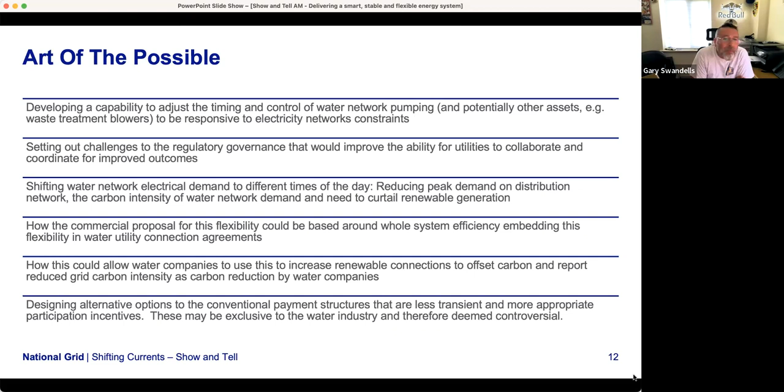So we've already developed quite a number of use cases, 16 in total, which capture the flexibility that's on offer within the different industrial processes they have, as well as the potential future consumption profiles from electric vehicles, etc.

So in the process, we looked at taking the outputs that we already had with the use cases and establishing, first of all, whether those were localized to South West Water only, or whether those can be achieved right across the water networks. Probably some of the key factors are whether the industrial processes are different, driven by the topography. South West Water is clearly very different from some other areas. If we look, for example, over to Anglian Water in the east of the country, the land is far flatter, so the processes of treatment and pumping, etc., do have significant differences.

But going through the process within Discovery, we took these use cases and captured data from quite a number of the sites across all of the partners we're looking at, and carried out a similar technical assessment in order to establish whether the art of the possible, what we were hoping to identify within the NIA trials, actually transpires through to a wider geography and a wider area of the market.

So coupled with that, identifying that indeed we've not seen anything conflicting with the assumptions that were made from the previous project Flowers, it's worth noting that the closed-down reports are all published from Flowers. So if you're interested in finding out more about the detail of the industrial processes that we're looking at and the latency that has been identified, those can be read in the Flowers outputs.

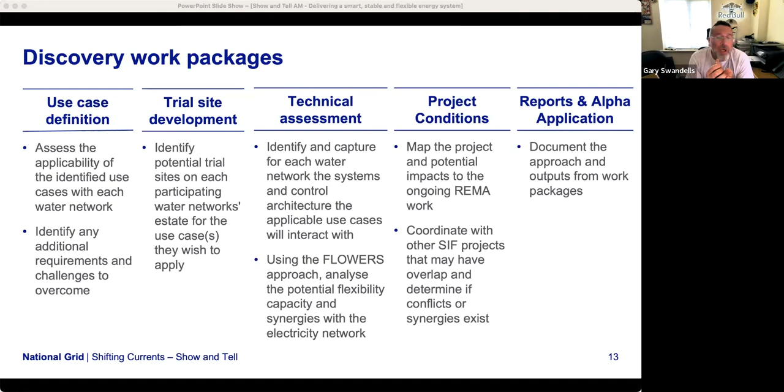But rather than pushing that into a system where it can be relatively transient, and the opportunities to generate income are sometimes not long-term enough for the way that the water industry itself does its budgeting, we're looking at alternative mechanisms that would, first of all, help them in acquiring more renewable generation, which in turn would help with their net zero targets. Can we move on to the next slide, please? And I'll just touch on project conditions.

Oh, so I'm sorry, I've already talked through that process. If we could go to the, yes, so from the Flowers project, there is quite significant value that we identified. We've tried to extrapolate that out as to the potential that may exist across the country as a whole. Within Flowers, we identified anywhere between 18 to 34 megawatts.

The variation is due to seasonality and also some level of investment that would be required in order to release that capacity. But based on them only having 2 million customers and 18 to 34 megawatts of capacity, if that's then extrapolated out to the UK population—and I appreciate for the discovery phase this is a very rough method of extrapolating out the benefits—what we could be looking at is anything from half a gigawatt to a gigawatt of flexibility on offer from the water industry as a whole.

Using the figures that NGED themselves have for procuring electricity, that could be as much as a £5 million benefit to the electricity distribution as a whole per annum. If we could skip to the next slide, please.

So in terms of moving forward from discovery to alpha, realistically what we're looking to do is—within discovery we've confirmed that the practical approach is the same, but as yet we've only really done this at a desktop level. So moving into the alpha phase, we're looking to identify the best sites across the partners we're working with, and carry out full operational trials on each of the different site types, be it wastewater or drinking water, and establish whether the desktop analysis and assumptions made therein can actually be achieved in proper operational outputs.

That would also include looking at the methods by which communications would take place between the control centres, engaging with regulators to discuss different mechanisms and alternatives for incentivizing that take them outside of the current developing markets. And then, if we're looking to encourage behavioural change at a local level, we also need to understand how carbon is calculated—moving away from using average carbon from total electricity consumption, and instead identifying the actual localized carbon impact of shifting load profiles in order to achieve better efficiencies within the networks.

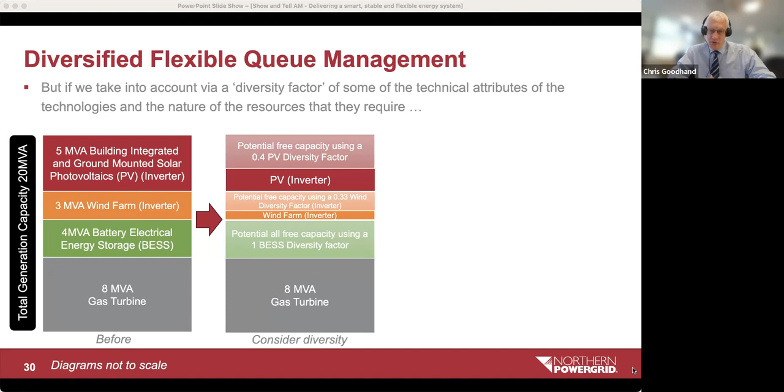So if we consider all this diversity and say, well, okay, how is the real world behavior of the generation likely to be, we start to look at that, we expect that there might be some available capacity that we can use to connect additional generation while we get on with building more network to support the longer term view. This project is all about exploring how we might do that, what issues we have, how we can dynamically manage the connection queue at any particular point, how we can regard the generation that's there and its inherent characteristics, in order to exploit that diversity and see if we have more available capacity. So that's the problem.

Mazher and Laura have been working very hard to actually answer some of those questions, so I will pass it over to them to tell you how they've got on with that. Thanks very much, Chris. If we can go to the next slide, please.

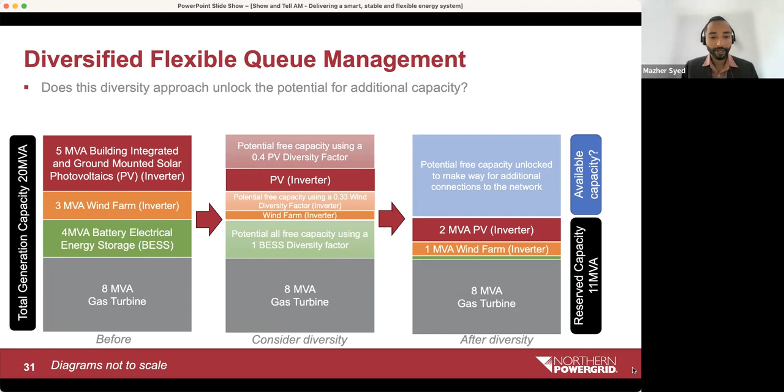Another one. So just a brief introduction. I'm Mazher Syed, an associate power systems consultant at WSP, and I was leading work package 1 of this particular project. The objectives of this project were delivered through 3 work packages.

The first work package looked at defining the problem and quantifying the problem at hand. The second work package looked at the regulatory barriers and any opportunities that we might have. The outcomes of each of these work packages, 1 and 2, directly fit into development of use cases and high-level benefit analysis in work package 3. If we can go to the next slide, please.

As part of work package 1, we developed and verified 2 hypotheses. The first was that the actual available capacity at a GSP is much higher than what we currently consider as available, by means of considering dynamic headroom that is available at the GSP. The second was that this dynamic headroom, this actual available capacity at the GSP, can be effectively utilized if we consider the diversity of the generation mix. So if you have a suitable composition of generation mix, then this dynamic headroom can be effectively utilized.

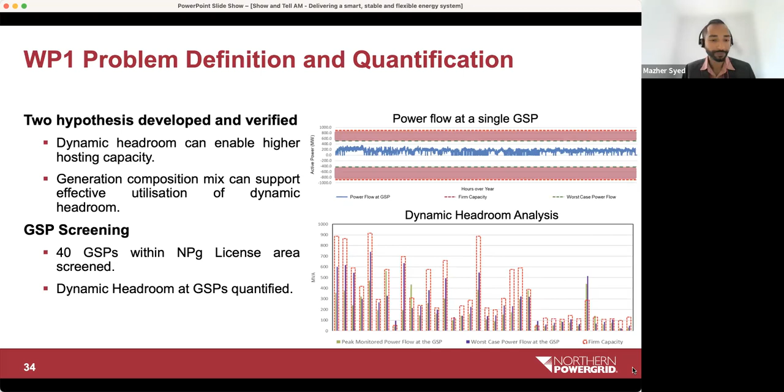In order to do this, we screened 40 GSPs within the NPG license area, and we quantified the dynamic headroom at each of these GSPs. We relied upon publicly available data to undertake our analysis from 2019 and 2022. Just a snapshot of this analysis is presented in the right-hand bottom corner graph. If you can go to the next slide, please.

At the same time, it was very important for us to engage with stakeholders to understand their point of view on the current existing connections queue management, and what their thoughts would be if we bring in this diversified flexible queue management. So we set out to identify a few stakeholders and assess their inputs based on likely interest and influence over the outcomes of this work.

We developed a questionnaire which was passed on to our stakeholders, and we also arranged 30-minute interviews with each of them to gather their feedback. We've had good sessions over the past couple of weeks, which is now directly feeding into our work in Work Package 3.

The outcomes of Work Package 1 and Work Package 2 have now allowed us to prioritize 8 GSPs for further evaluation. Now we are working towards developing use cases and demonstrating the high-level benefits that can be acquired when we incorporate the diversified flexible queue management.

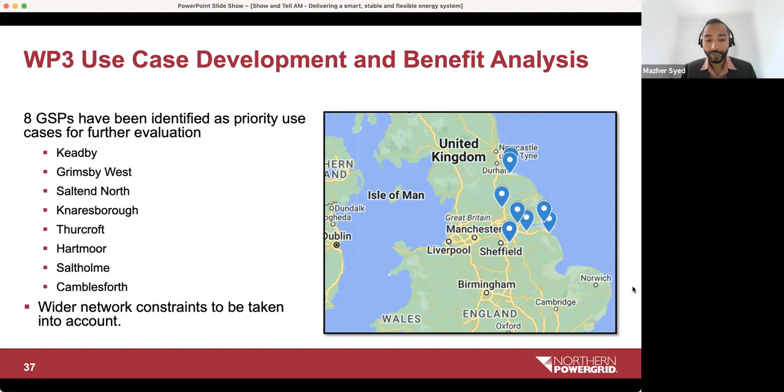Right at the beginning of the project, we had set forth some hypotheses. We had a feeling that by utilizing the diversity of generation and load within the network, we could enhance the hosting capacity. Through the work we've done so far, we've been able to verify this hypothesis, and now are optimistic and excited to proceed to the next stage, the alpha stage, to develop the proof of concept. Now we are working towards refining our objectives and work plan for the alpha phase.

That'll be the end of my section, and I'll now hand over to Laura.

Good morning, my name is Laura Brown and I'm the Commercial Manager for Flexibility Services in Northern Powergrid's System Flexibility team. Thank you for your interest in this project, and I'd like to briefly summarise our further discovery phase dissemination plans.

We have 3 routes in addition to the show and tell today. We're going to deliver a more comprehensive show and tell session and make that available online. There'll be outcomes posted through our media channels, and we'll be preparing a paper for the IET Future Power Systems Conference later in the year.

I'll quickly go through the conclusions to leave some time for questions. What we've found in this study is just what we thought: the discovery phase has shown some really promising connection timescale benefits from taking diversification into consideration for both generation and demand.

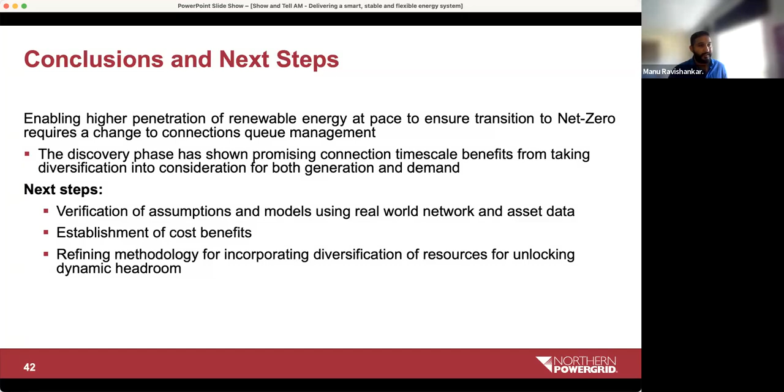It might be hard to answer this, but it might be interesting to pick up on how the cost of this kind of unlocked network capacity might compare to traditional reinforcements. I know there's a whole complexity around the methodology for doing that, but keeping that aside, do you have a sense of scale?

Yeah, I think there's two elements here. We're doing this to help with connection speed, to help put connections on the system ahead of reinforcement works, so it's more a speed thing rather than a cost. The cost benefit is that the customer's connected sooner and can start their business model ahead of the original prediction - that's the real benefit.

From a cost of traditional reinforcement, it's not apples with apples, because this is really just looking at the queue management and the decision of what available capacity we have, the mix of generation and demand types we've got, and real-time data of what the network's actually doing at particular points, so we can make more intelligent decisions. I know the word Chris used was squeeze, but I don't want to scare anyone - that would still be a very safety-driven decision about putting on new capacity, it's just about managing that capacity once it's on board to make sure safety and resilience isn't impacted.

Got it. So I think we're just going to run out of time - maybe just on that, a follow-on question, Laura. That's going to be my next question.

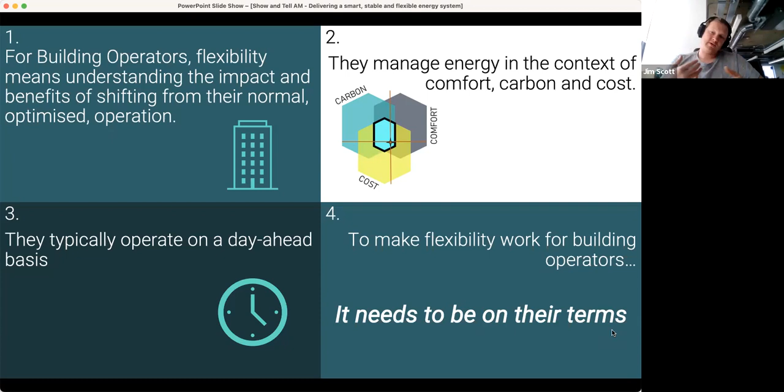The next slide, therefore, characterizes the technical and propositional characteristics of what they would engage with. This is our findings, not just over the course of the discovery phase, but in testing some straw man propositions with different customers, actually trying to sell some of these propositions as well, which is quite interesting. Things have gone well and badly, erratically, depending on the way that we've pitched our service to two different existing customers that we have. I'll talk a bit more about that in a moment.

So what does on their terms mean? Well, it means aligned to their timescales, measurable - they're very data driven. What they mean is, if there's a complaint, I want to show the person complaining that it was okay, it was actually comfortable, I was doing my job as a building operator. It has to be transparent in its impact and the way that it works. They don't want to be fleeced, they don't want to be taken for a ride. They don't mind you making money out of them, but they want to know what's going on. And it needs to empower our building operators and not override them.

So these are the technical things that we have to achieve in the solution. From a propositional point of view, on the next slide, please, Chloe.

Building operators view their buildings as personal. They're full of people whose names they know, and they completely reject this idea of being aggregated into a blob — just megawatt hours available for dispatch. That is the opposite of what building operators serve their tenants with. They serve you with receptionists, floor guides, maps. The way they think about their buildings is very personal and unique. They are not the same as the next building, even if it looks like a glass box to you.

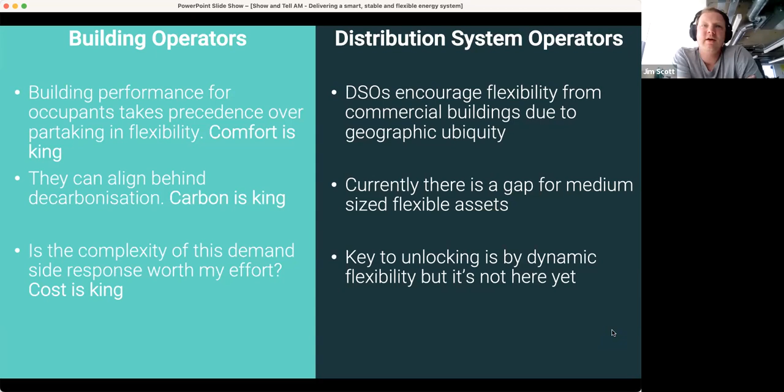So we think the answer to this — if you could pop to the next slide for me — is if we can build something that meets these two user stories, we will win. We will unlock that flexibility. DNOs will be able to turn things up and down on terms acceptable to commercial building operators. These are a little bit high level, and there's obviously quite a lot of depth that needs to be done underneath, but this is what the market is telling us we should build for.

At the moment, we have an offering as Grid Edge that looks a little bit like this. It starts with a high-level energy tracker view, so it's just fiscal meter data. It goes into a deep dive into a building management system. And at the end, we do quite a bit of work around flexibility for capacity and balancing market price signals. That's where we see quite a lot of our traction coming, where we're switching things on and off inside a building due to electricity pricing. We obviously want to change that to start switching on and off due to DNO signals as well, and that's where the dynamic market fits really well.

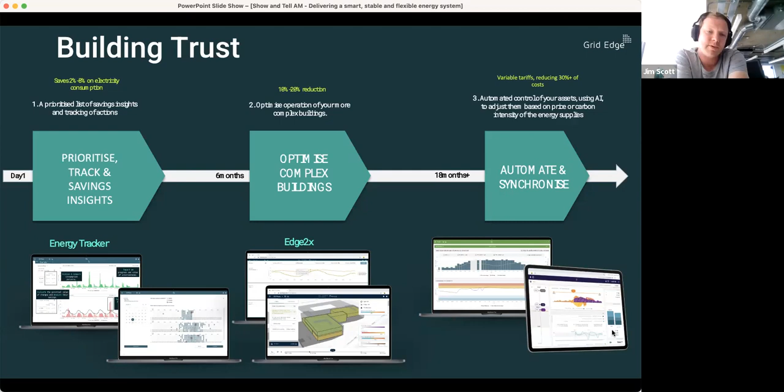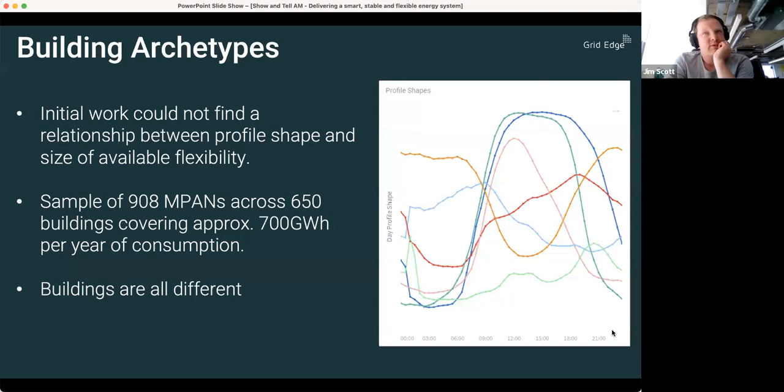On to next steps to wrap up. We've got a bit about how our thinking has evolved. To summarize, timing and engagement remains a challenge. There's a lot of DNO voices - we know the pathway, we're working on it. That's very difficult for us to go to market and talk to our customers about properly, because it needs to exist. The static market's been a really helpful bellwether and has got us going in the right direction. So we're very much looking forward to when those dynamic markets start to mature, is our best word for it.

We've learned that engagement is absolutely best packaged with familiar faces. Building operators, or building owners, are not keen on having yet more parties drop in. So facilities management companies are the way to go.

I suppose the final piece is around data sharing and integrations. The geospatial problem that's been talked about quite a lot already certainly applies here. This market request and response integration doesn't exist, and the maturity of demand forecasting for dynamic markets is something that DNOs highlighted as a gap for them.

The next one is the final plan, which is what we will do. The main one is we will wait for the DNO dynamic market to be ready, because that looks like a good fit for this type of flex. What I want you to hear is if you build it, the flex will come, but it will need assistance. Building operators will need a little bit of help, because you're not talking to them just right at the moment - you're saying recruit and aggregate and dispatch, and they don't want to be spoken to like that, is the blunt way of saying it.

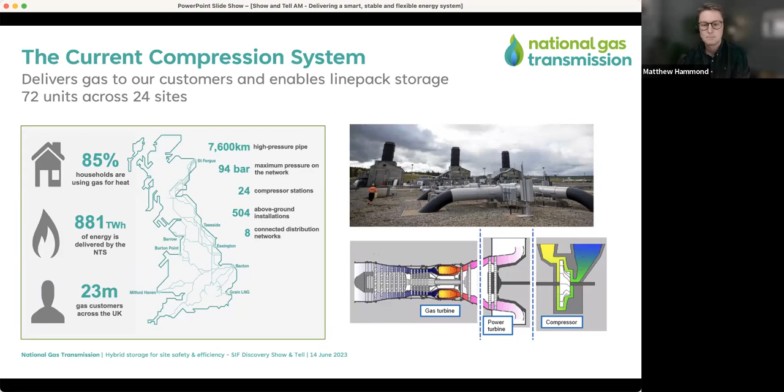We utilise over 70 compressor units across 24 sites strategically placed around the country. Most of our compressors are driven by gas turbines. We take natural gas from the network itself and burn this as fuel gas in the turbines.

That means they produce carbon dioxide. Because we've got over 70 of these units, most of them gas turbine driven, that means this is the biggest source of emissions on our network.

Therefore, we're looking at ways we can decarbonise them. Previously, we've run feasibility studies which showed it's possible to fuel our existing gas turbines with hydrogen blends and 100% hydrogen. We realised the largest emissions reduction comes from using 100% hydrogen generated from electrolysis using green electricity. However, due to the intermittency of green electricity availability, we expect we'll need hydrogen storage on site.

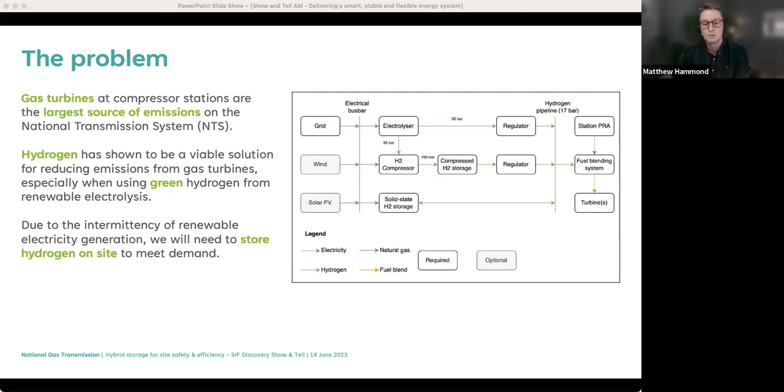In terms of storing hydrogen on site, there are safety regulations in place which specify that permits are required for storing more than 2 tonnes of compressed hydrogen gas.

Currently, our compressor stations do not fall under these limits. These are the COMAH regulations. Two of our terminals do fall under the COMAH limits, and these have significant additional safety and security measures in place because of these regulations.

Solid state hydrogen storage is an emergent technology which can store hydrogen at high energy densities, but at ambient temperatures and lower pressures compared to compressed gas storage solutions. However, the flow rates and pressures from the solid state storage system may be too low for what our turbines require in terms of fuel gas conditions. That is where compressed gas storage can come into play.

This project is essentially looking at the feasibility of a hybrid system with a solid state storage part and a compressed gas storage part, and looking at how we can optimize this using an AI tool. This means we can store hydrogen on our sites without entering into the COMAH regulations.

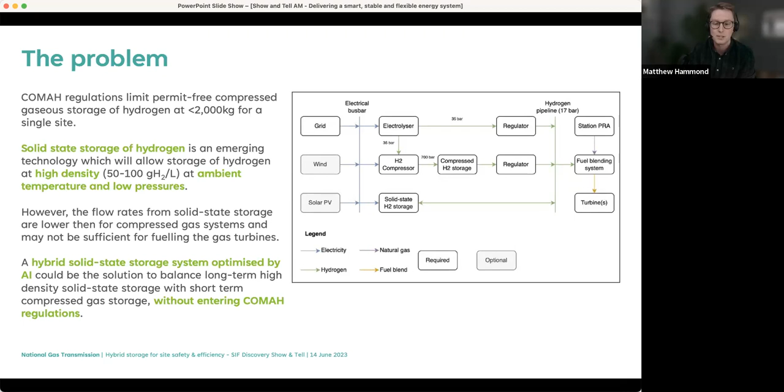To carry out the project, we've got a number of partners on board. Obviously ourselves as the owner and operator of the assets we're looking into. H2Go are a technology company with a portfolio including the solid state storage technology and their AI tool, which we've deployed in this project.

The Manufacturing Technology Centre, a research technology organisation working across industries to support UK manufacturing, are looking into the system manufacturability and assembly.

UK Power Networks are electricity distribution, as you've heard this morning. Wales and West are a gas distribution network, both of which may be able to utilise this solution on their own sites. They have an interest in supporting the project from their side.

Finally, Nottingham University have expertise in solid state storage for hydrogen and are peer reviewing and critiquing our approach to make sure we're taking the project in the right direction.

Some general points on the system requirements and developing the use cases. We know that most of our turbines can be repurposed to run on hydrogen, which means the rollout of this solution can be network-wide essentially, which is good news.

However, the utilisation of the gas turbines varies from site to site, which will have an impact on the design of the system. A turbine with high running hours may require a large electrolyser with smaller storage, while a turbine with low running hours may require a small electrolyser but larger long-term storage.

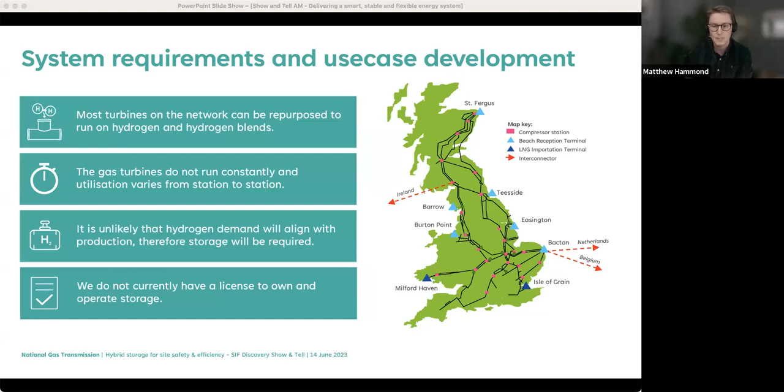In terms of site selection, there's a few things to consider. The first point is that all of our compressor stations are different, no two are the same. So different equipment, different available space on site, different locations. The water and electricity supply will vary, and that will play a part in how our system needs to be designed.

We also need to consider additional use cases to the gas turbine. We've previously run a project looking at the feasibility of fueling other assets like heating and diesel generators with hydrogen, again to realise more emissions reductions from our compressor station operations.

There's also potential for local hydrogen users who could tap into our supply, which would further build the business case for this kind of system. Consideration of other hydrogen projects is a nod to our electrolyser efficiency project, which I spoke about yesterday, and also UKPN's Connectrolyser project, which we have been supporting. There's potential overlap with these projects as the alpha moves into beta phase.

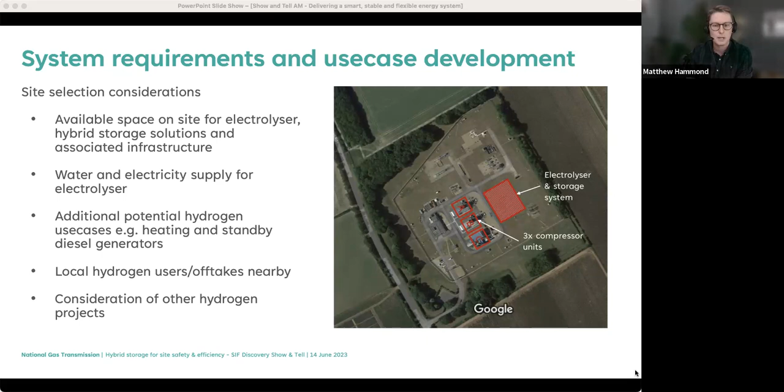Next slide please. I'm now handing over to Luke at H2Go, who will talk us through the solid state storage and HyAI tool. Thanks for that intro, Matthew. My name is Luke Sperrin, I'm the CTO of H2Go Power.

H2Go Power is a hydrogen technology company, and through this project we showed how we can apply our most mature technology offerings: our solid state storage on the left hand side, and our AI optimization platform called HyAI on the right hand side.

Our storage system sits in the middle between hydrogen production and hydrogen usage - in this case, the electrolyzer and the hydrogen turbine. We take the hydrogen gas, store it for a period of time, and release it when needed. Storage is needed for system resiliency, but also to take advantage of the best time to produce hydrogen and the best time to use it, which often don't overlap.

Our solid state storage is a containerized plug and play system consisting of material that stores hydrogen gas at room temperature, released when needed to balance supply and demand. We house this material in carefully designed modular reactors, allowing us to get the hydrogen gas in and out as quickly and efficiently as possible.

The benefit of this kind of storage is that it's low pressure while maintaining high density and low cost. The hydrogen gas is chemically bonded until required, dramatically enhancing safety while preventing hydrogen leakage. These containerized systems can add up like Lego blocks to achieve the storage and high flow rates, so you can expand the site as its requirements change.

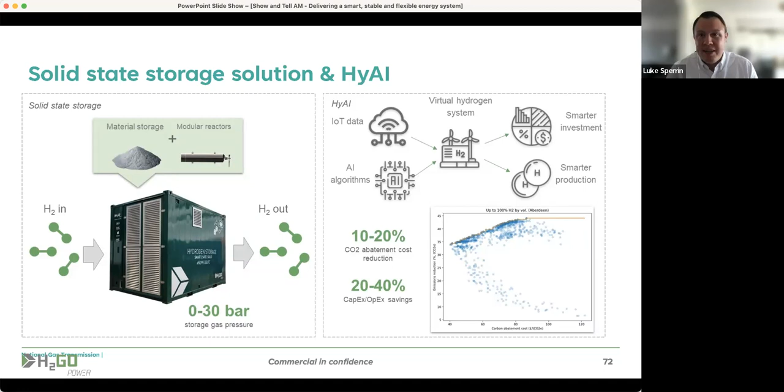I'll finish there and move to the next slide - I think I'm handing over to Andrew to talk about the work they're doing at the MTC. Thank you, Luke. My name's Andy Perkis, I'm an advanced research engineer at the MTC, working on R&D projects and design and build of machines for proof of concept, aiding UK manufacturing.

During the discovery phase of this project, we analysed the past runtime data of the turbines located at the site earmarked for installation. We identified the period for which the turbine saw the greatest consumption of fuel and mapped out the inputs and outputs of equipment for the creation, storage and distribution of hydrogen to support this historic use case.

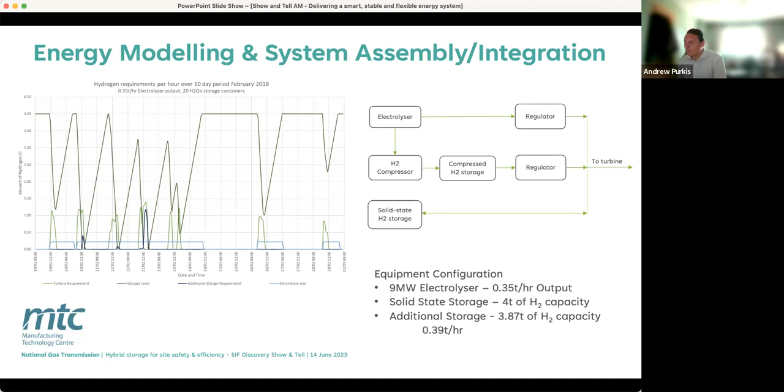This is a pictorial representation of an example layout that we look to take further into alpha phase. Our activities at the beginning of this alpha phase will focus on further developing this energy model, incorporating the electrolyzer type proposed by other electrolyzer projects, the turbine exhaust heat recycling equipment, and all the ancillary and balance of plant equipment required for system operation.

Alongside these activities, we will further research additional hydrogen storage solutions, performing a down selection process using comparative requirements such as safety, energy efficiency, equipment lifespan, capital and operational expenditure.

Once we have identified this optimized configuration, we will move on to the design activities, performing a full system design and site layout, running through our design review process, ensuring safety is at the forefront. We will then identify the permits required for installation and develop a test plan ready for moving into the beta phase. As part of the design activities, we will identify opportunities for packaging equipment into modules to aid transportation and deployment on site.

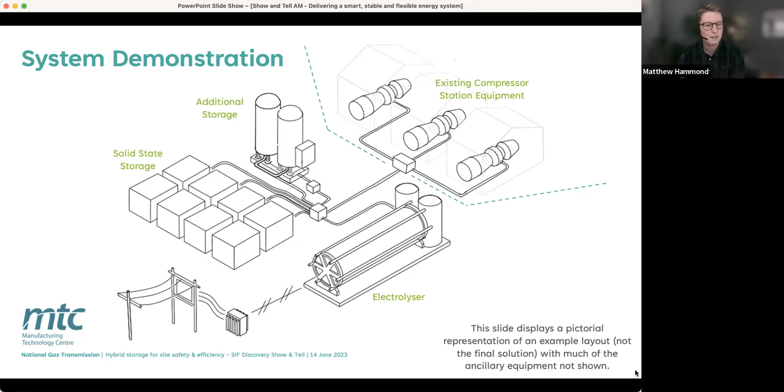That's great, and I think we can move on to the final slide as well. Just to finish off, covering some of the things we want to cover in Alpha: nailing down the use cases and the demonstration requirements.

We obviously want to demonstrate this on site and demonstrate the benefits we are hoping to see from the system. That will lead us into a full system design and get a more accurate view of the costs in terms of rollout across the network.

We need to overlap with our electrolyzer efficiency project, which incorporates waste heat recovery from our gas turbines to feed into an electrolyzer. This hydrogen storage system would fit nicely into that, and the aim is that we would demonstrate these together in the beta phase.

As Andy said as well, planning and permits is going to be a big thing, along with policy and regulation considerations. It's not just a case of one day you can suddenly say, I'm going to start putting hydrogen into this turbine and start burning it.

For the demonstration, we also need a test plan which demonstrates those benefits of the system just to prove it works. Engagement with local hydrogen users is also important - there's the potential that industry users of hydrogen could tap into our supply and continue to build and understand the business case for the full network rollout as well.

So that brings us to the end of the presentation. We can now move into questions, I think.

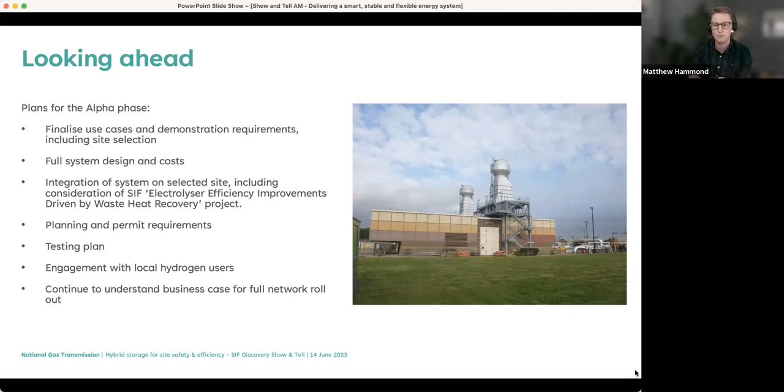I've got one clarification question to maybe start out with, and then Nick, maybe I'll come to you afterwards, which is on the energy modeling chart. I think that you were showing did not have the power input into the electrolyzer. Was that like an optimization function? Were you also looking to optimize in terms of the input?

The reason I was asking was, I think one of your previous slides essentially had carbon reduction as a potential objective function. If you were to have carbon reduction as an objective function and you're trying to run the electrolyzer in line with perhaps when the grid intensity changes, how does it affect the overall operation? And does the system configuration still remain if the electrolyzer is kind of tracking carbon?

I think that initial energy model that we built up was something that was an initial one, something that we looked to further develop at the start of the alpha phase, and really feed into it some data on green energy production on the grid - so green energy on the grid, and feed that into that scenario further. That's something that we'll look to take into within the alpha phase. I hope that answers that question.

Yeah, no, I think that's fine - just a scope question I think. And just as a follow on, I guess, to what Matt was talking about in the last slide, which was looking at synergies with the solid oxide electrolysis project as well.

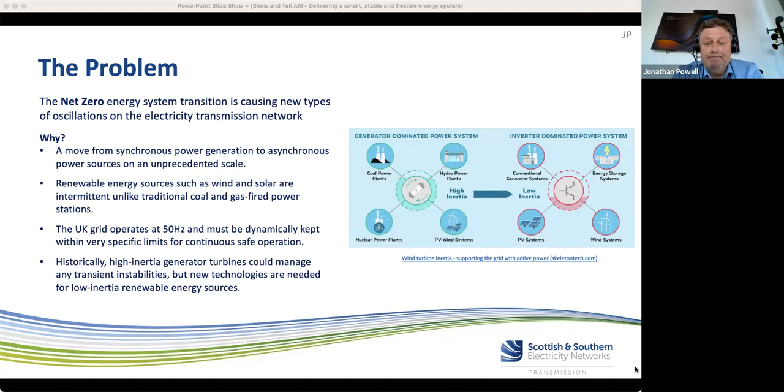So over to Jacob for the next slide. Hello, yes, I'm Jacob Kelly, I'm a Transmission Operation and Planning Engineer at SSEN Transmission.

I'm just going to give a quick overview of the project, what its objectives are, the benefits, and what we've done in the discovery phase. The real long-term objective of the project is to try and deliver a virtual real-time alert and control system that can monitor and then provide actions to mitigate different types of oscillation events experienced on the network. If we can do this, we can improve the network stability and reliability.

We can reduce the likelihood of network disruptions, and it is potentially a low-cost solution that does not require contracting expensive stability resources, either bringing on existing power stations or constructing new synchronous plant to provide that stability to the system. It also allows us to act and react in real time to events that haven't been predicted in the planning phases, which helps improve the resilience of the network as well.

Throughout the discovery phase of this project, we've been looking globally and within the UK to get a real understanding of the problem and the best practice of what other people have done, where the industry's at, what tools are available just now, and where they look like they're going in the future.

And we've investigated the kind of models and tools that we can use to simulate these network events, the kind of patterns they are, and look at how we can use those to design a system that can do this. Because one of the key things in designing this is we need to be able to test it in a meaningful way.

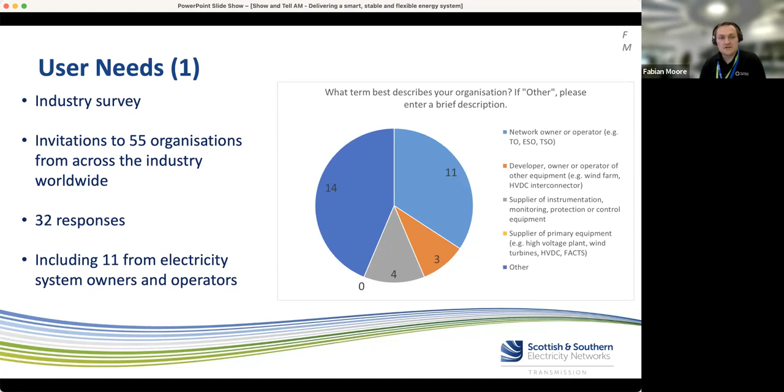We led a bit of work on stakeholder engagement and trying to find out what the rest of the industry is doing. So we sent out an industry survey to 55 different organisations from across the electricity industry. We got 32 responses, including 11 from different system operators and owners. So that's across the UK, but also including Europe and other countries across the world.

And just as a pie chart there, showing who responded to the surveys. The largest category is other, which I think are generally industry-led research groups or academic universities, and consultants. But the largest industry group that we're familiar with is the network owner and operator. So that's our background.

So just to summarize what we learned in the survey, it's quite hard. We had a number of questions on a variety of topics related to modeling and measurement of this phenomena, these kind of oscillations, power electronics. I think the takeaway was, although most system operators and owners had some capability to detect and analyze these oscillations, they were all concerned about their capability not being sufficient in future. There's an increased risk of inverter-based oscillations in future because there are more and more of these renewable energy devices. At the same time, existing monitoring systems are very reliant on manual analysis.

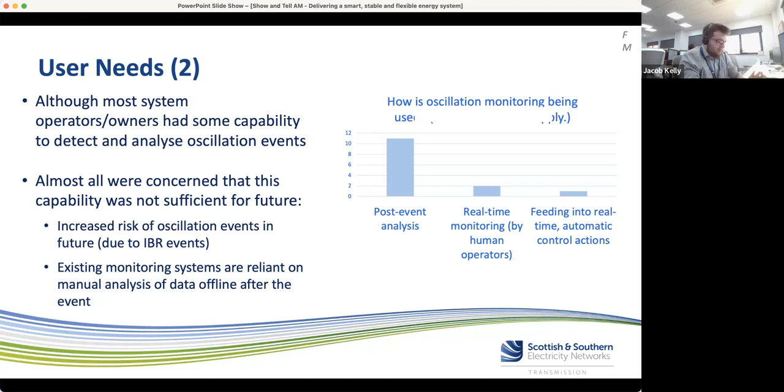Yes, so I'm going to cover quickly one of the reasons that we've got some opportunities to really address this problem, both through the project and through the wider industry position that we're in at the minute. There's been a lot of work on innovation projects and elsewhere on looking at collecting the kind of data you need to monitor these oscillations. You need high sample rate, high resolution data collected centrally to be able to analyze these events.

So the VISOR project, the previous NIC innovation project, looked at these events and collected that data into a collection system. And as part of the outcomes of that, there's PMU deployments across the UK, both in our network. Scottish Power already have a lot deployed, and National Grid are looking at the same. National Grid then get this as part of STCP 27-1, a new transmission owners code of practice. We need to install these PMUs for visibility. So there is going to be lots of data available from the network to address these issues.

It's also the case that the IBRs are coming into the network. They don't have the same system stability benefits of a standard synchronous machine, but they have a lot of really useful technical capabilities that can be used to mitigate these events themselves. And they've got very large megavar ranges. They can be designed to have power oscillation damping as part of their control systems, and you can change their control modes on the fly effectively, if you design it that way. They are effectively computer system control modes, so they can be changed. You can't change the properties of your synchronous machine, but you can on your power electronic device. Next slide, please.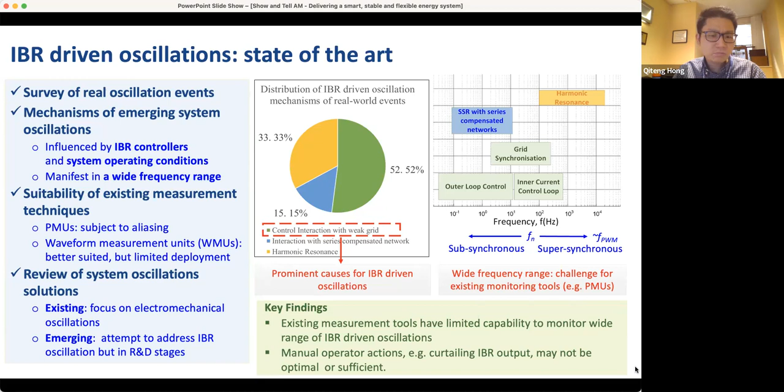In order to better understand the phenomenon, in addition to literature review, we also investigate how we can model, simulate, and replicate those events in our lab or on our platforms in alpha phase. We look at high fidelity EMT modeling, and also relatively lower fidelity phasor domain. We also look at how other people around the world have simulated or replicated those events to gain experience, and then develop the modeling and simulation requirements for us to pursue in the alpha phase.

What we found is EMT modeling is what we want to proceed with because of the wider range of frequency of the oscillation we are targeting. We also found that ideally we should aim for vendor-specific detailed controller models from manufacturers, even though it could be a black box. Although it's possible to use a generic model, it's ideal to use a vendor-specific model, given the dependency of the oscillation on the controller design.

On the right-hand side, you can see a modeling plan we came up with. First stage: targeting the oscillation type and area we want to target, then collecting the required data we need. The third stage is developing the real-time model in the RTDS simulator - that is the key stage we are going to pursue in alpha phase. This will help us understand the oscillation better, but also allow us to further develop it to enable real-time testing of potential insight solutions, and beyond beta, through hardware-in-the-loop closed loop testing. We are going to pursue this beyond alpha phase.

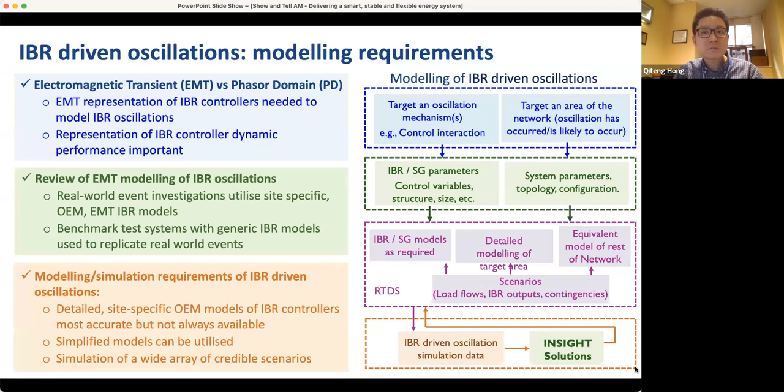I'm going to quickly run over some of the potential benefits of the project. I think the key thing with this project is that the benefits are kind of end-goal benefits, but every step along the way, every step we do in terms of further understanding these events, in and of itself introduces a lot of benefits to understanding the system, understanding how we can plan and operate it going forward into the future.

If we can deliver a system that does real-time monitoring, alarming and control, it really does improve system visibility. By doing that, you improve the resilience and reliability of the system. If we can do that, we can provide actions for real-time mitigation of oscillation events. We can respond to real-time system issues, improving the reliability and resilience of the system. It also lets us, even if an event hasn't been predicted through the models we've created or in the system planning stages, still respond to it - giving that resilience and reliability to unforeseen future events.

It also uses the inherent capabilities and benefits of IBRs - inverter-based resources - in terms of their control modes. Yes, control interactions are the driver of a lot of these issues, but you can change them. They can be changed - they're computer software. They can be altered and used, and it's trying to make benefit and use of those tools that are coming to help increase system reliability.

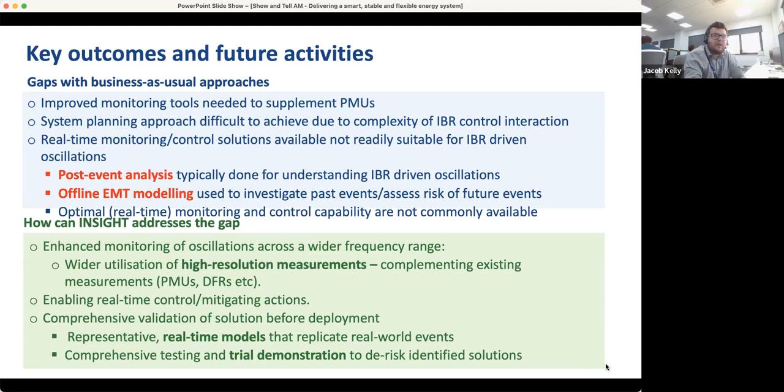Thanks, Jacob. Thanks, David, Qiteng, and Jonathan for the presentation. Again, quite a fascinating project, looking at what some of the issues could be in future stability on the power system. I think I've not seen any questions, but I think we've got a couple of minutes.

I've got a couple of questions, if that's okay, just to kick us off, maybe until questions come in. I guess the first one is, you looked at international experience, and I think you did some surveys. What are the key learnings from other countries? Is the UK going to be facing some of these issues earlier than some of the other countries? Because I know the US, some states particularly, have looked at inverter-based resources and their impact on power systems. Is there any learning on what they've found and which direction they've gone in terms of either a market-based approach or mandatory requirements on some of these assets to dampen oscillations, etc.? Any learnings from international experience?

Should I answer this one, as I did the survey? I think internationally, all utilities are experiencing similar types of oscillations and problems that they've got to manage as a result of the move to power electronic devices and away from traditional generation. And I think most people are relying on the traditional approach that David outlined, of trying to get people to achieve compliance through studies up front. But the gap in that is that people still connect things, they think they've solved everything, and then something comes out of the woodwork after it's been designed, and they have to try to understand it and adapt the control or design of equipment so that it gets fixed.

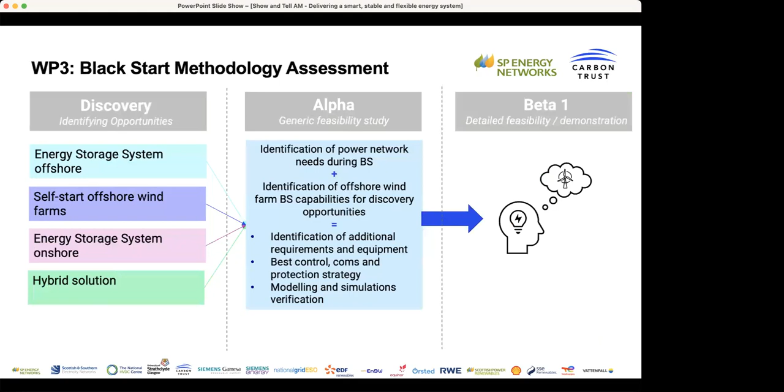Yep, so this is Agusti Egea, senior lecturer at the University of Strathclyde. Mainly here, I'd like to discuss the technology aspects of Black Start. What's interesting about Black Start from offshore wind is that this is a new functionality, and there are a lot of implications, not only from the point of view of the market, which we'll discuss later, but also from the point of view of the technology.

In fact, we are still discussing how to do it. In Discovery we did a literature review, and we also had a lot of discussions with wind turbine manufacturers and plenty of discussions with wind farm developers. Basically what we saw is that there are four main different technical ways to do Black Start from offshore wind.

Usually they are classified by where the initial energy for the first kick comes from to start the wind farm. Some options have this first energy kick coming from offshore. For example, we can have energy storage sitting on the platform, or even some discussions around using the diesel generator that already exists there, even though it seems small at this point.

It can also be self-starting wind turbines. This means each, or a group of, wind turbines has an energy storage inside the turbine, and this is what provides the first kick.

Later on, if this energy doesn't come from the offshore side, it might come from onshore. Basically this means we might have a battery nearby - other SIF projects like Incentive suggest something similar - so the energy can come from a battery onshore, and later on you energize the cable, and later the wind farm.

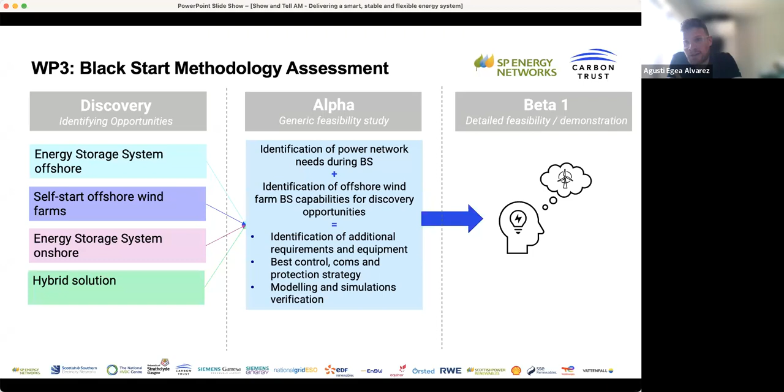After that, once we have identified the bits and pieces that would make this possible, we'd like to go for a more detailed feasibility study, and also a demonstration site - these days we are already in discussions to try to identify this site. Next slide.

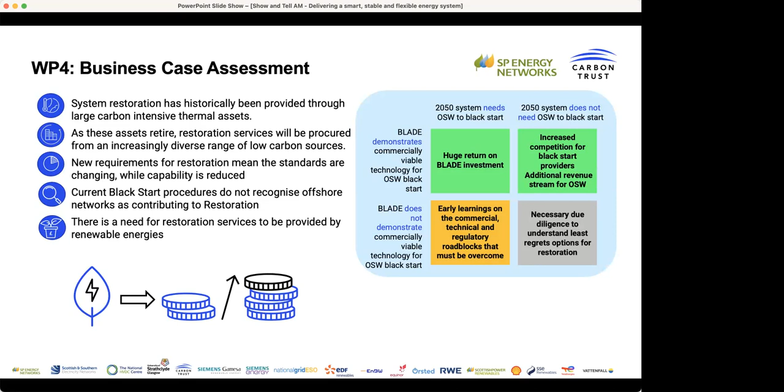We've brought together 18 parties in the consortium to discuss the issues around getting restoration from offshore wind going. The discovery phase confirmed our suspicion that there's a classic chicken and egg scenario preventing commercial investment into the technology and rollout into commercial developments of offshore wind.

What we're trying to do in this project is stop that cycle in its tracks. With that broad consortium, we have people across the board to address each of these issues - that's the need for the alpha phase. I'll hand back to Ian to give a high-level view of what we're planning.

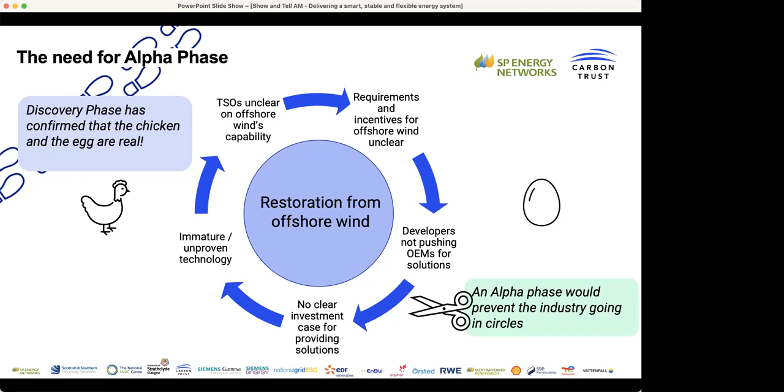As Augusti and Robert said, we've done a paper exercise. We're now all aligned as a consortium about what we know, what the gaps are, and how we need to move it forward.

For the alpha phase, we've broken it into two key chunks: an economic assessment of onshore system restoration - quantifying what it will cost to retrofit and upgrade a wind farm versus putting it in from the start - and what local grid upgrades are required.

Because it's not just about the wind farm itself - it's about enabling the wind farm to energize our network for up to 50 miles. If we can get the electrical network, as an example in Scottish Power's transmission network, energized for 50 miles, we then know we can build in additional assets within the electrical network, whether that's within SSE or National Grid, in order to supply power across the whole of the GB network.

So we can harness power from East Anglia, from the north of Scotland, and in the case of Scottish Power, off the East Lothian coast, in order to bring up our network in quick succession.

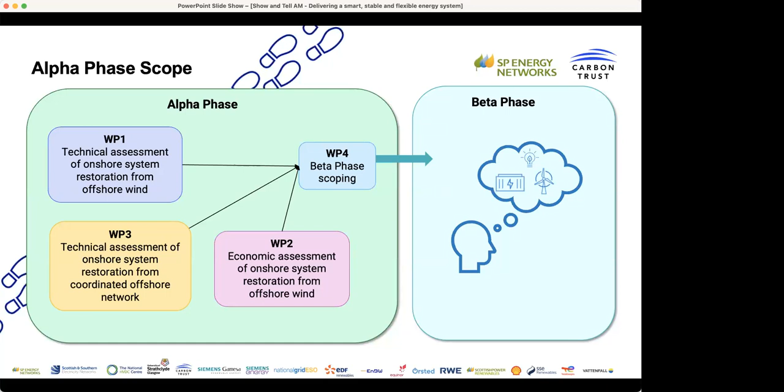Ian, sorry to interrupt, but if you can finish up quickly, please. Okay, I can finish up there then, Manu, yeah.